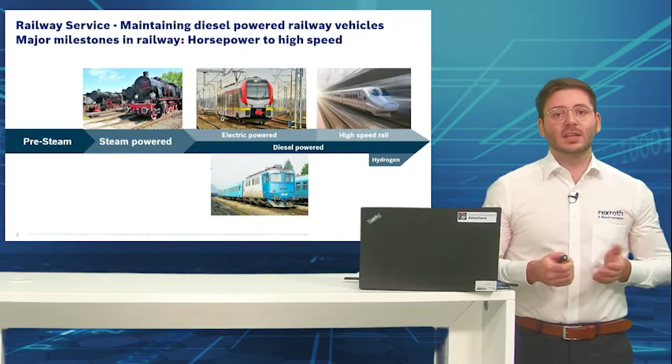We had some big achievements there from the Siemens brothers, and then of course we also came to the topic of the diesel powered ones. And this is the main one we're going to talk about, diesel and diesel electric powered vehicles. Of course at the moment we see quite a lot in the high-speed area, so a lot in the electric area, high-speed trains. When we talk about TGV, ICE, or even in China and all those areas, we have plenty of this coming up. And of course we also have the topic of hydrogen as one of the new technologies that is emerging and getting more and more important also for the railway section.

And hydrogen, I think it's a topic most of you know. We are in this field as Rexroth, as a company in hydraulics. And if you're interested in a little more on hydrogen, you have to come to our Hanover Fair booth in April, or there will be also a web seminar based on this topic. So I was curious that it's already in here, but of course it's part of the game. Yeah, but still I think some more facts would be interesting here.

Let's look a bit in the market first of all, to get information on the installed base. So it's around about 68,000 railroad vehicles, we're talking mainly about rail cars and locomotives, and we're just talking about the EU and the UK. These are some information from the International Energy Agency report from 2022, so just to have some figures around that market. And if we look into the split of the energy, the energy mixture is 50-50 roundabout.

So it's slightly more for diesel powered vehicles, but it's around 50-50. If we look more detailed into the freight transport section, there we have two-thirds of the transportation done by diesel powered vehicles.

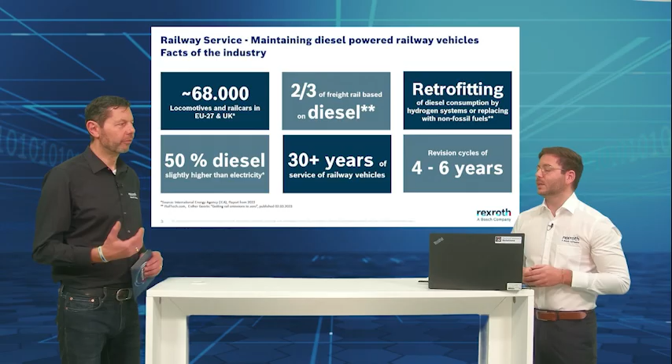So I think you already understand what the market needs and drivers are. What would you say they are? If we look into the goals of the industry, of course the first big point is energy cost, directly combined with the topic of low emissions. The second part is what you can abbreviate as RAMS: R for reliability, A for availability, M for maintainability, and S for safety. These are key aspects where Rexroth can help with its service offers to really get the benefits out and secure these goals for the industry.

And that's what we're going to look into with our key offerings for the industry. But before we go into these offerings, I would be interested in the portfolio of customers you're serving. Is it regionally based, or how would you say?

They are, of course, big players, big OEMs. Of course we have local end users. If we're talking, for example, in Germany, we have Deutsche Bahn as one of the big operators. We have that, but also local subsidiaries in Germany, and of course we have that in all the other country units as well. But there are really some big players in the market.

So let's have a look. First of all, we have to say Rexroth is not an OEM in this section, so there's not a train with a big Rexroth sign on it. This is not what we're doing, but we're one of the key suppliers for that industry, so our products are part of many, many trains. I just put here some names of the key OEMs in that section: Stadler, Alstom, Bombardier, Siemens, Vossloh, and so on. There are plenty of them that are really well known.

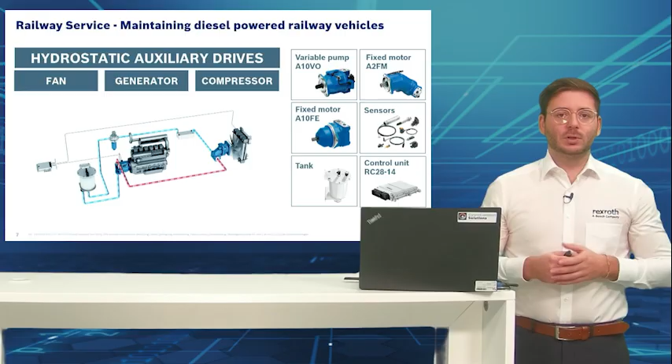Of course, in stationary applications this is mainly not done by hydraulics, but in such cases it is driven by hydraulics, and we use a clear portfolio for these applications. Normally we use the A10VO as the variable pump. What is really well known in that section is the A2FM motor, the main motor for the fan drive, compressor, and so on. We also use the A10FE as a motor, and additionally we have some sensors, the tank control unit, and so on.

But to make that a bit more clear, I have some pictures and examples from the market where you can find that. I think these pictures, and Stefan, as you said, you traveled today exactly with one of these, Deutsche Bahn here - maybe this could be one of these. I think the color is quite clear, this is a well-known OEM. So these are typical applications where we have the fan drive. The end users are miscellaneous, so the equipment here, for example, is the fan drive, and normally we suggest operating hours of 18,000 hours and then have a service. This is an example.

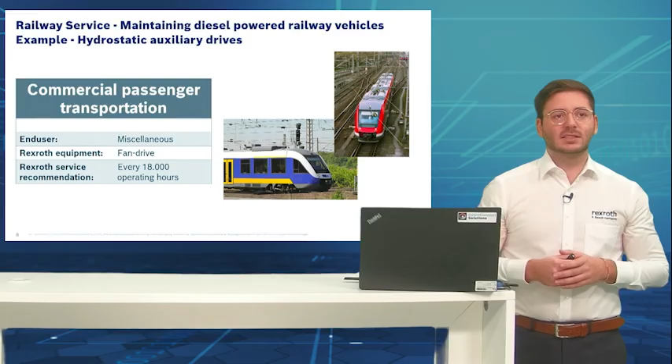As I mentioned, we have the A10 in different sizes, and we have the A2FM motor exactly here for the fan drive. In that regard, it's size 10 to size 45. This is what we use as components here - 18,000 operating hours. So what is that typically in years? Depending, of course, let's say 4 to 6 years, exactly as I said before. Quite long. Yeah, definitely.

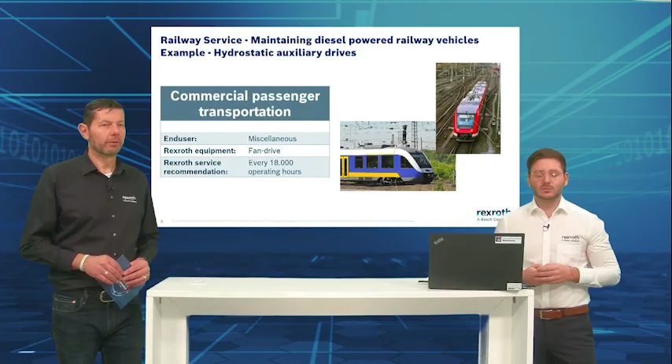For that example, it's the size 140. And the operating hours here are a bit longer, about 24,000 operating hours. After that, we recommend a service for that.

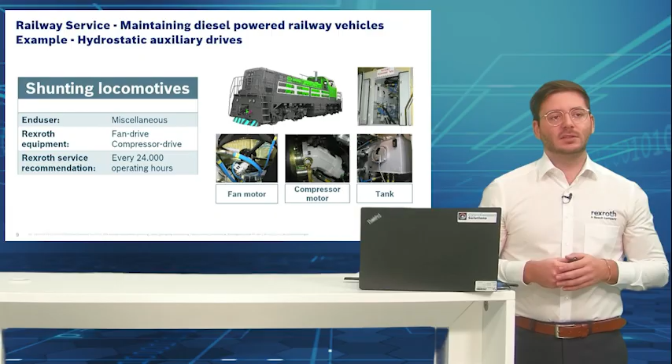Shunting locomotives are the engines that move things in train stations, or they move within operation areas. Hundreds are in the market. If we talk about the picture before, the passenger locomotives and rail cars, it's thousands of them that we have in different markets - you're traveling with them every day, so you know them best.

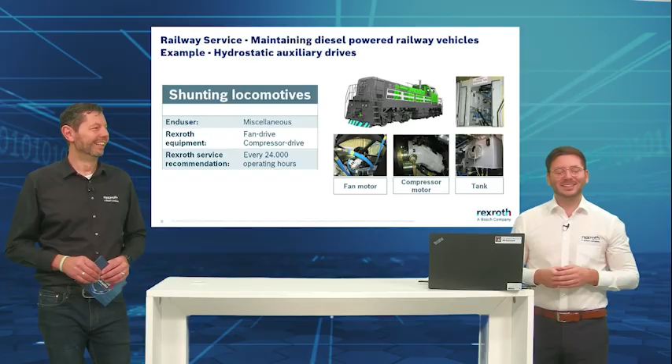Where do we have that? We have that for specialized rail cars that have to maintain a really, really low speed by steadily moving forward and also transporting high loads. So we're mainly talking about the rail construction area - all the rail construction machineries, what we call the yellow fleet, as they are most of the times yellow.

And we also have some clear components that we use in different sizes. Normally from the pump side, we use the A4VG, so the closed loop pump. We normally use the A6VM as the motor for that. And we also have some safety manifolds, sensors, and so on that we use in that regard.

As I said, it's mainly on the rail construction machinery - all the typical ones: rail grinding, rail milling, ballast plough, track tamping, and others, so I cannot name them all. What is important, of course, is the big part is the traction drives. But as mentioned before, we also have the hydrostatic auxiliary drives - there's a bunch of hydraulics, especially in these vehicles.

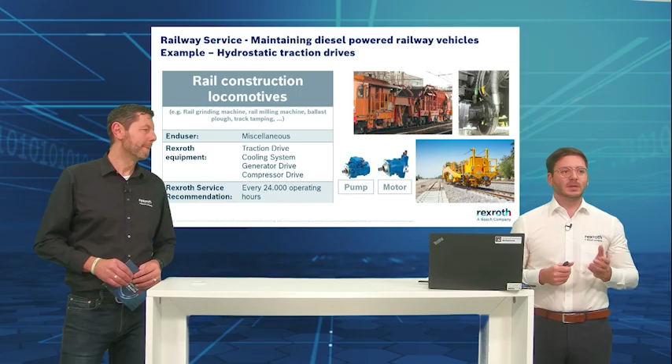I would just want to say this is really impressive, because I just saw them last year in the construction of our track here, and these are really, really big machines. I just imagined how much weight they must have to carry, and of course that's a typical hydraulic solution.

That's a typical hydraulic solution, and as mentioned, it's a traction drive plus the additional auxiliary drives, and that directly brings us to the next point. If we're looking into the construction machinery, it's also the working hydraulics that we're using for the job they are really doing, and that's the third major part.

So it's on the working hydraulics, and this is really huge. The area of what they are doing is huge. I talked about rail grinding, milling, ballast plough - so it really depends which components we use dedicated to the job they are doing. So I cannot give a service recommendation on that. The portfolio of pumps, valves, cylinders, motors used is broad. I think that's quite clear.

So now we've dug a little into the technology, the applications, and even the products used. So now it's time for the service, right? Definitely - so there are some offerings you have in this area.

I think the key for such industries covering billions of kilometers every year in the harshest environments is exactly what we said with the RAMS: reliability, availability, maintainability, and safety. So the first is, of course, technical know-how, and we can technically support in many, many cases, and I will show you what we have as a team behind.

Of course, then we go into the topics of spare parts - we will show some examples. We have non-seal spare parts, seal spare parts. We look a bit more into the topic of replacements and the topic of recoding, what we can do - we can recode from competitor products, from old material numbers, but we can also recode from OEM material numbers. I'm going to let you know a bit more about that. Of course, we can use our benefits of a service.

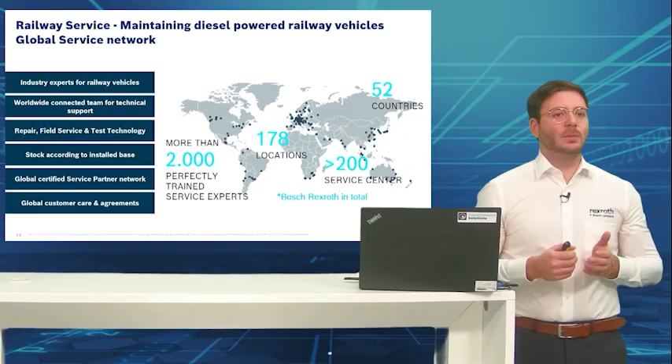Definitely, I think one of our big benefits is our service network, our global service network. We're around 2,000 service experts in Rexroth, in around 180 locations with more than 200 service centers. What we have additionally is these so-called industry experts - people focusing purely on one industry. For example, I have people in my team focusing purely on railway, and we have a worldwide connected team that is purely on the topic of railway. Of course, we're going to talk about repair, field service, and testing.

What is important for us? We always want to talk with you about the topic of installed base, because then we can stock accordingly. If we know what's in your market, we will adapt and prepare for the upcoming service actions that can come up. An important point also is our global service network and local presence - so that means we are close to you. Even if Rexroth is not directly there, one of our certified partners will be there and can support you in the best way.

Well, I think more than 200 service centers, that's a really awesome number of locations. Let's give us a look into one of these, please. Yeah, I took one example here - this is one of our service locations right around the corner, I could say, actually, here in Lohr am Main. So this is our service facility in the middle of Germany.

This is a separated service from the plant area, and this is really important. So we have our own incoming goods, outgoing goods. We're fully set as a separate building with all the functions that we need. The green building that you see here on the screen is all service, and it's around 1.5 soccer fields in size.

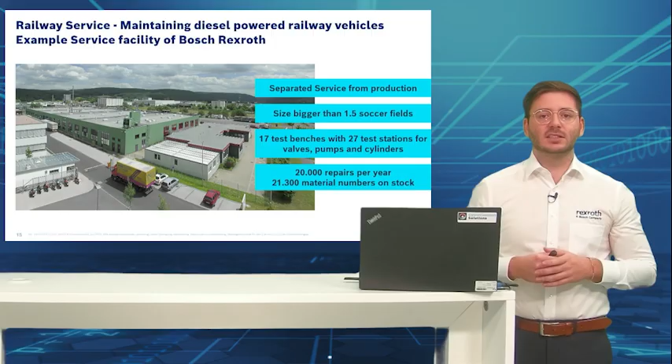And we have around 17 test benches there with 27 test stations for all the materials that we do - pumps, valves, cylinders, and so on. Within this service center, we do around 20,000 repairs in Lohr, and we stock around 20 to 21,000 material numbers.

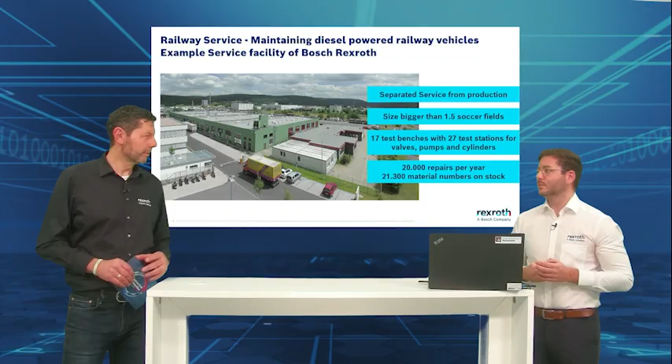Yeah, I was in this stock area, it's really impressive. But also the test benches, I think they're a major, crucial part - they must be quite big. Yeah, definitely, so the test bench is a crucial one. I'm going to talk about that when we look into the repair section.

I just brought one example here. So this is a test bench that we use for repair of pumps. This is one where we have 4 test stations, so we can go up to 1,000 liters per minute as a flow. The power is 200 kilowatt. The speed goes from 500 to 3,000 rounds per minute, and the pressure is up to 420 bar with a torque of 1,500 Newton meter. And this is for open and closed loop pumps.

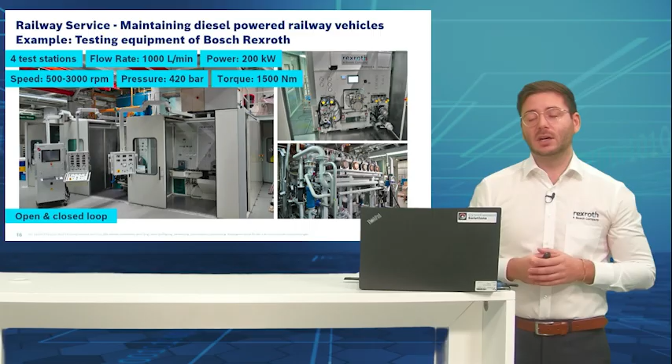You see some detailed pictures here as well of one of the test stations where we can really test all the pumps, and then all the products that we repair are fully tested to our original manufacturer specification before they leave our company and come back to you as a new part with a new warranty as well. So you were already talking about repair, but looking at this overall offering, there's much more in it.

Yeah, so maybe now it's time to give some concrete examples on the local offerings. Exactly, and I want to quickly look into the topic of spare parts, spare parts and the topic of recoding and retrofit.

So we had a customer, we visited this customer, and after that visit, the customer came back to us and said, you have been talking about recoding, and I have one case here where that could be helpful. So we're talking about one old shunting locomotive, a smaller one. It's the Windhoff RW30DH.

This is using an old Sauer Danfoss pump, an SPV2, which is not in production anymore and could not be repaired anymore because there are also no spare parts available. This was a big problem for the customer because he wanted, of course, to enlarge the lifetime and keep this locomotive.

So what did we do? We looked into that. What is this pump doing? What is the function of the pump? We investigated on that, we came to the topic of the traction drive, and then we did an active recoding.

So we looked into the hydraulic schematics, we looked into the original data sheet, we looked at what we have in our portfolio for these topics, and then we came up with a technical report for the customer telling him, okay, you can use the A4VG in the series 32 with a detailed number. I posted it also here on the slides, which will definitely fit your needs.

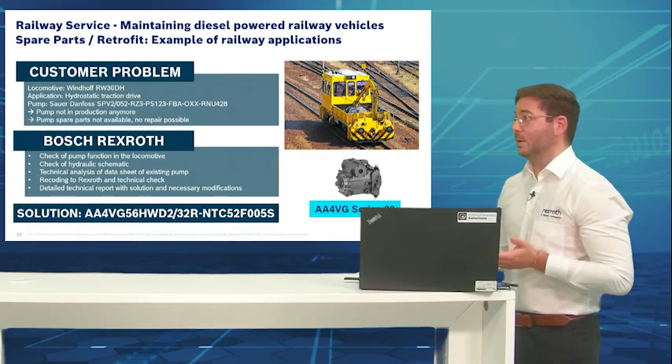And we also gave within this technical report some recommendations on what needs to be changed, because of course if you're doing a retrofit, this pump needs to fit into the locomotive. There's not that much space. In that regard, we had some benefits because our pump size is smaller than the existing one.

Okay, yeah, that's it about recoding. So we can really support on that if we're talking about phased out products that are not in the market anymore, if we're talking about some competitor products as we see it here, but also if we're talking about OEM materials, where it's not always clear if this is a Rexroth component or not. Please do get in touch with us and we really have a look into that section. That's it about the topic of spare parts and recoding.

And now I want to talk a bit more about the repairs. So first of all, we can offer different levels of repair: standard repair, urgency repair, emergency repair, but of course our fixed price repair.

And the fixed price repair has some really good benefits because you have a cost security and you have a planning reliability. So you know exactly when you approach your customer what you have to pay at Rexroth and also what is the lead time for these components.

And of course you can be secure that we use the original spare parts, and all our products are developed to the code of tribology. So all the surfaces are perfectly suited for the oil that you should use for these applications.

Of course, I said it already, all the repairs have a 12 months new parts warranty. So after you get it back, you have security that they are working. And of course, you can rely on our maximum quality and reliability.

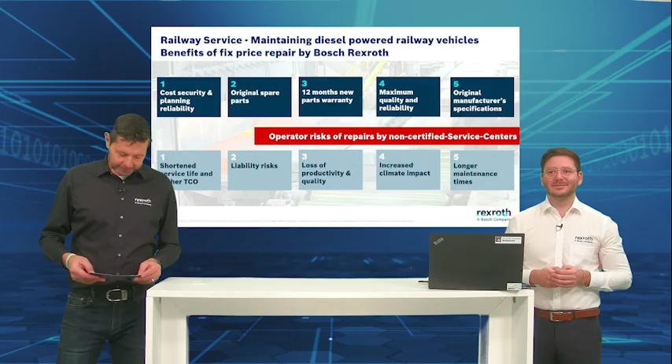Good to see that your idea was confirmed here. Thank you for this. So I'd say let's dive a little deeper into the repair topic, getting a little more concrete.

You wanted to know some examples. So fixed price repair, I talked about it, the benefits and the risks of not doing it with Rexroth. Here's a concrete example of how we use it.

We use it with one of our maintenance operators for railway vehicles. He's responsible for repairs in the section of rail cars. We saw that especially in the auxiliary drives, when talking about the fan motor, we have the A2FM motor in smaller sizes. So what we defined is 8 material numbers, A2FM, size 12, 16 and 45, with dedicated fixed price repair.

Additionally, we do with that customer a quantity review each year to plan and secure all the lead times. That helps the customer a lot, and it also helps us to be fast, to have the right quality, and of course to secure the price.

I think you brought a testing report with you? Yes, I want to show a bit more how a repair looks and what feedback you get from Rexroth. This is one of the typical reports that we have. Situation here, as you've written, there were some things done by, as you said, the gray sharks, the smaller ones, and the customer was not so satisfied, or problems occurred.

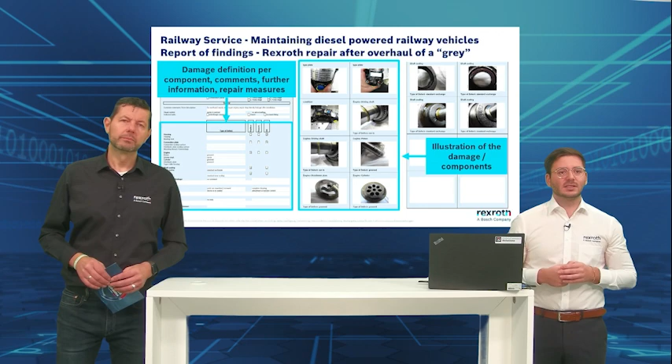It was exactly the way you say it. We got that repair from one of our customers, and this customer already had it for an overhaul at a non-certified service center. They told the customer, okay, this is fully repaired, but after installation, after a short time, he had problems directly again with that component. Exactly this one is an A2FM motor for our fan drive.

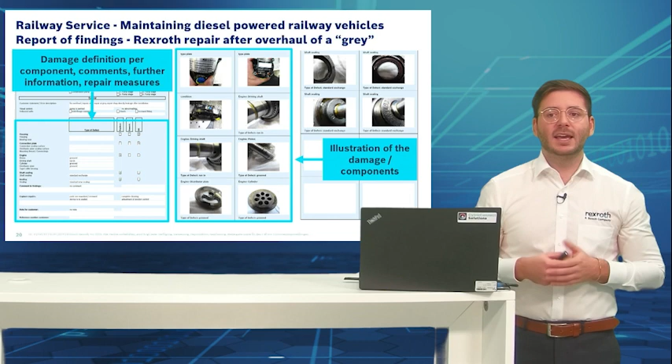You see one of our standard reports here, exactly the one on that case. You see we have the damage definition per component, some additional comments, further information, and we also put in our repair measures. Additionally, we have an illustration of the damaged components.

As I said, it came to us after an overhaul at a non-certified service center. So we opened the component and looked into it. What you can directly see here is that on the rotatory shaft, it was repolished. It's not that easy to see, but we also see a bit the run-in part where it's a bit lighter. Also, there are two lines where you can show it on the screen.

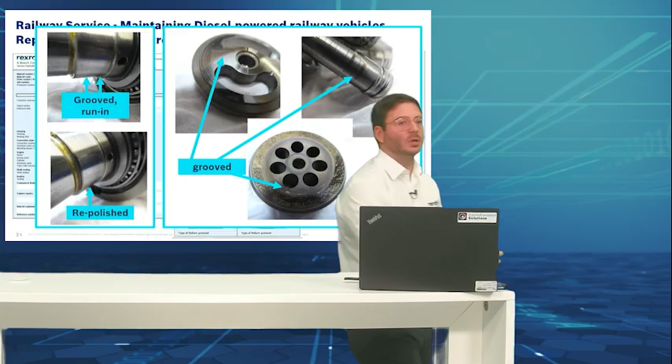Let's do it this way. I need to step a bit here. So you need to see it here above, where it's grooved in. What we can also see if we look into the distributor plate and into the piston, it's grooved.

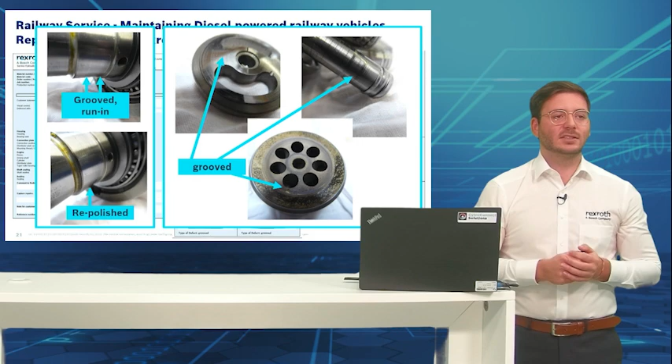So to sum it up, there was a problem. What they did was change the rotatory shaft seal, but it was not mounted in the right way by the gray one. We saw that directly, but there was no replacement or anything done on the other parts. The piston was not changed, nothing was done on the distributor plate and so on. So it was sold as a full repair to the customer, but it was just getting rid of the external leakage, while there were still other problems. Within the working situation, it wouldn't have lasted for long.

So coming to the total cost of ownership again, this would not be a good investment. Definitely, and if the machine is then on the track, blocking the whole track, it's a big problem also for all the surrounding vehicles and for the maintenance plan.

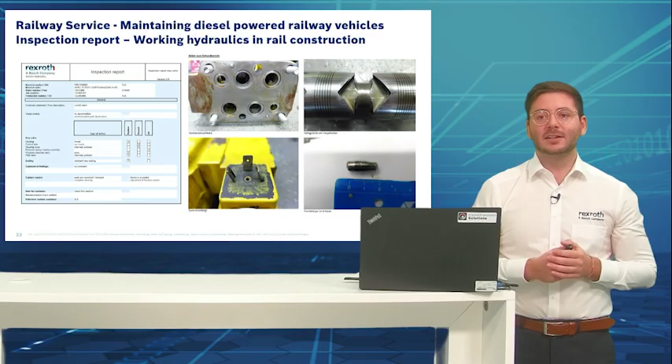If we see the additional pictures, we also see at the main piston here that we have cavitation, and also a shiny part on one side. So there's a part flaked off that shouldn't be shiny on that part, on the left side of the piston. And if we also look into the piston rod, we see that there's cavitation in the piston hole. We see also that it's a bit grooved in, that we have cavitation there.

So this is, I don't know, this is a Rexroth product? That's a Rexroth product. But the question would maybe be, what about competitor products? Is this also something that you're offering? Yeah, of course we're focusing on our products first to repair them, but if we're talking with our customers and they say, can we also take that one as well, send it to us, normally we can get it going. If there's a problem we will tell the customer, but if it's a competitor product, also send it to us and we will repair it as well.

So we're talking now about repair in the repair centers? Yeah. But you also offer the, how you call it, field service? Field service, yeah, so repair on site in very urgent cases. Yeah, this would be interesting too, I would say. Exactly, so we will support you with all our fields, with our feet on the ground, with all the people that we have out in the market.

In that regard, the customer asked us to do troubleshooting on one of the locomotives we have. So we're again in the rail construction machinery. There was a problem, so we sent out a technician who did troubleshooting and then also investigated that we need to bring it for an internal repair to a Rexroth facility.

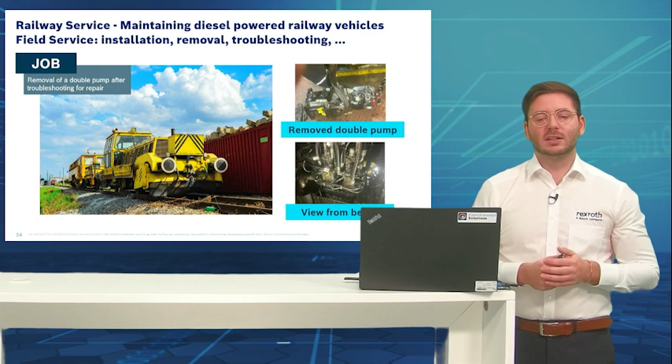Of course then we did the repair and afterwards it was mounted in, it was installed again also with support from us, with some help to the customer. So I think quite impressive.

As we said, we already did a web seminar on this, so if you would like to have a look, go to our YouTube channel on the web seminar section or on our website, Connected Hydraulics. You will find it, but some more insights on the CytroConnect maybe would be helpful.

So our digital service portfolio for that is CytroConnect Solutions. CytroConnect Solutions is a solution package divided into three major parts. We have a smaller one that is purely on monitoring, then we have a second enlarged one which is also on rule-based analytics, and then we have the third, the highest solution that we have.

That is an AI-based analytics with full monitoring from our side, with maintenance recommendations, with regular reporting on all the applications that we're monitoring.

A big problem is what I already said. If this machine is working, the track section is blocked by this machine. So if there's any problem, of course, it causes high cost of downtime. And another important topic is if this machine cannot work because it's broke down, there are just a few of them in the market, and it's not easy to get one of these machines to replace the other one. So that's not that easy.